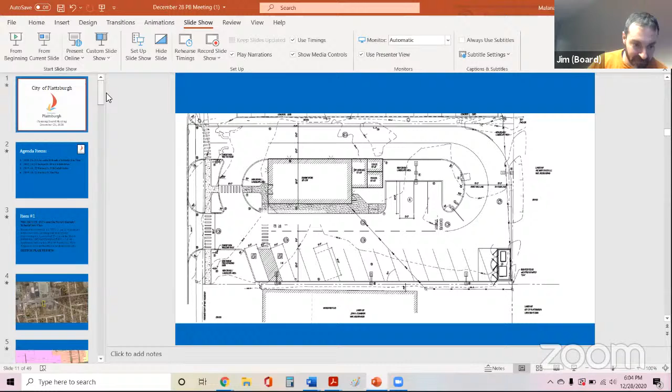The first item is item 2020-21, 311 Cornelia Street, the Dunkin' rebuild. This is a request to construct a 2,572 square foot restaurant with drive-through, parking, and related site improvements. It's located at 311 Cornelia Street, zoned B2, tax map parcel ID number 207.17-2-16. The applicant is Tim Daly, and the plan preparer is Brooks Washburn, and they're both on the call with us tonight. This is a sketch plan review.

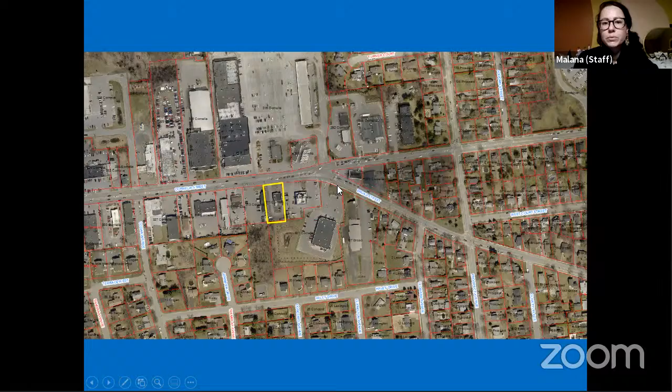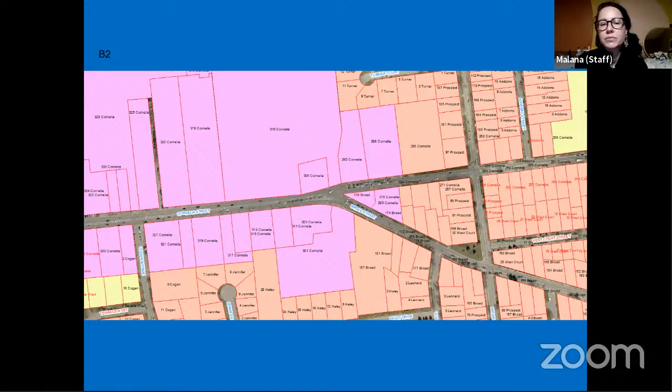This is an overview of the site, highlighted in yellow here. This is Route 3/Cornelia Street, the Broad Street Cornelia Street split. Here's our zoning map showing the property is in the B2 district. This is a demo rebuild, but for the record, I will state this is an allowed use in this district and no variances or special use permits are required.

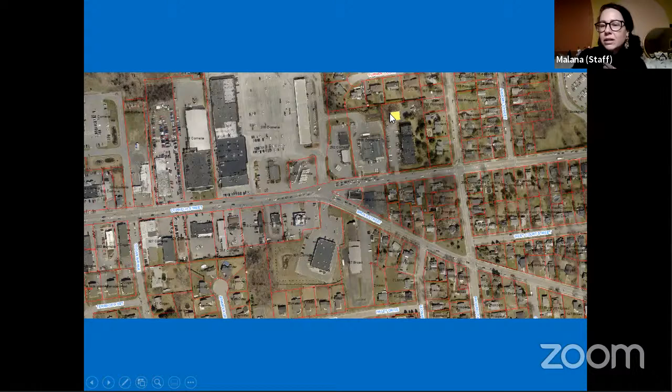This is our historic overlay map. You can see that it is not in the historic district. I think there's a little tiny garage over here that was demoed a few years ago that was historic, but that's it.

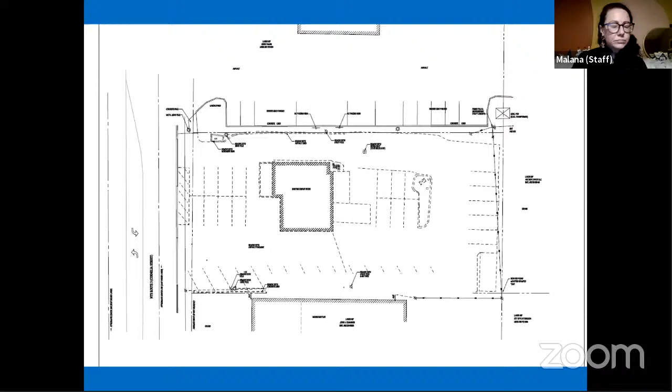This project is at sketch plan review, but the applicant was able to provide the board with some detailed site plan information. This is the existing site plan. You can see the Dunkin' building in the middle of the property, surrounded by the drive-through loop and parking, with no sidewalks.

This is the sketch plan of the proposed improvements. The building is pulled a little further towards Route 3, which includes sidewalks along Route 3 and a pedestrian connection to the front of the building. The site still includes that drive-through lane, with a similar parking layout, and also includes a bypass lane which will be doubling as a mobile order lane, as I understand it.

As I said in the pre-meeting, a lot of fast food restaurants are moving towards accommodating online ordering. My understanding is that people will order online, bypass the drive-through lane, and go straight to the window. There's a bit of concern about traffic conflicts and how those mobile orders cut through in front of the drive-through, and what window they pick up at. There wasn't a clear indication on this plan of whether there were two windows for pickup, so we'll have the applicant clarify that in a minute.

Another comment I had was about this bypass lane looping all the way around the building. You can see here it cuts around the front of the building. I'm recommending to the board that the applicant remove that slip lane from the front of the building, and instead add some additional green space and a seating area.

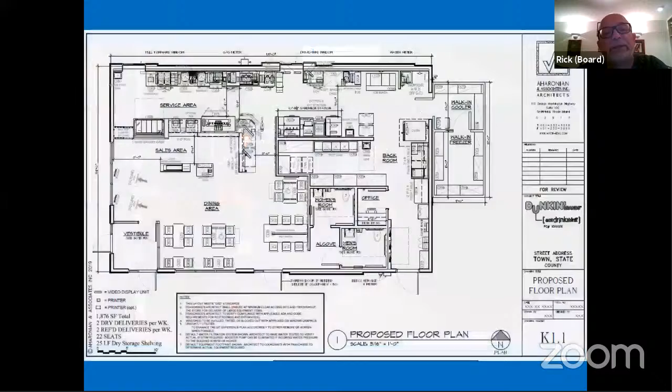I'm going to repeat the question that I had regarding the parapet. Although architecturally it looks really nice, the parapet wall where you have the word Dunkin' seems like its only purpose is for the signage. And I'd like Joe's interpretation rather than making an assumption, so Joe may find it compliant. I think we should ask him for his opinion.

Yeah, it is, as Malana said, it is an architectural form, partly for the reason she indicated, to keep these things from being just little boxes with high and low and that sort of thing. With respect to the sign code itself, the lettering would be compliant with the allowance for square footage of signage.

I hope Joe would say the parapet is a piece of the building, not that the whole thing is a sign. As I said, it keeps these from being just little boxes. The parapets, which you'll see in shopping centers now too, instead of just being long strip centers.

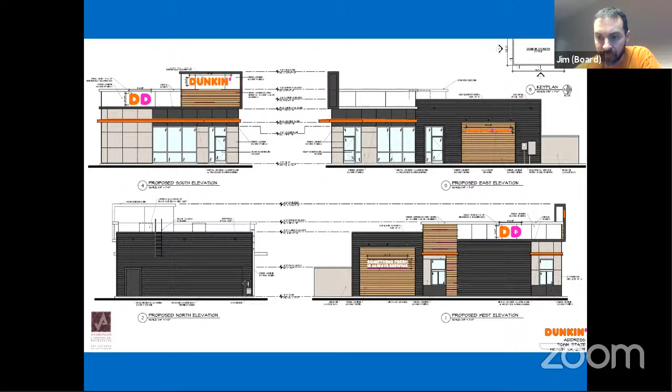Rick, I'll reach out to Joe and get that confirmation from him. I think it'd be prudent to get an overall indication on signage for the site from the applicant and have Joe review that and give his determination. Yeah, no problem.

As Malana pointed out, the floor plan and elevations we submitted with the initial submission was a prototype. This next round will be this building for this site, this sign code, etc. So it's safe to assume your floor plan's probably going to change a little bit with doors, egress, and that type of thing. Actually, the footprint of this building is a bit smaller than that prototype, which I think is a good thing.

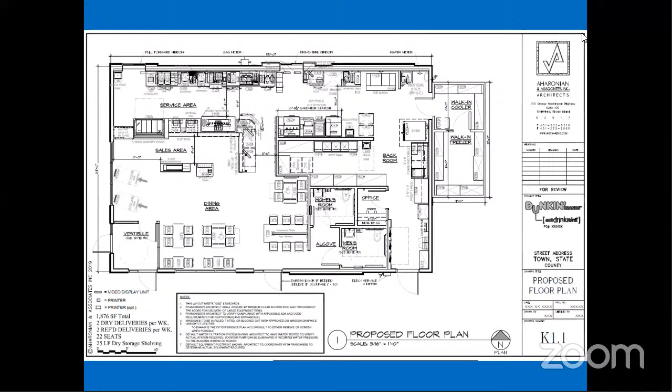I have a couple of questions. I understand this was a sketch plan to get it into the board, and you have an updated survey and probably updated information. Has there been any further consideration and discussion in terms of the slip lane and stacking for the drive-through, and then the angled parking, the way it's oriented right now, and how that might change with the site now that you're taking the parking out of the front, which I think is an improvement, but now you're going to have more people park on the side.

Part of the trend, as I understand from working with Tim, who manages many of these, there is a slight change in the ratio of meals served by the drive-throughs, mobile pickups, and walk-in eat-in. Partly a result of what's happened in the last 8 months, but also a general trend. A lot of people are saying with respect to building designs and jobs in general, we're going to get back to normal at some point, but it's not going to be exactly the way it was before. People are going to keep some of their old habits.

So they're liking the mobile order, mobile pickup, and drive-through pickup. We found there's too much asphalt and too much parking on the present site. If you look at a lot of these restaurants, not just in Plattsburgh but everywhere, there are a lot of empty parking spaces, so we're trying to not have more parking than we need. As Loretta was saying, the front 40-foot setback is respected - that line got erased, but that front 40 feet, with the exception of this little bypass or slip lane, is all green.

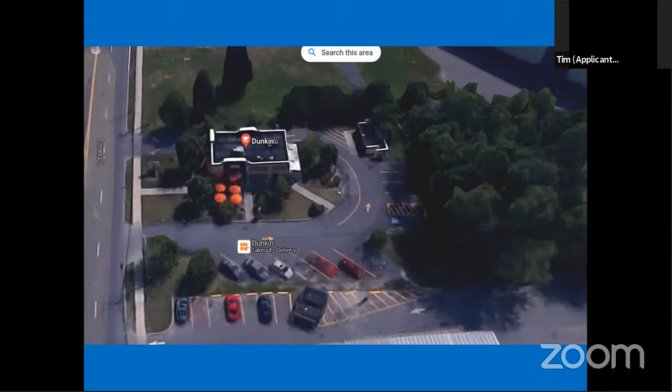Not only the width, but we also expanded further back than where we currently are for ordering, by putting in the island at the back.

This may sound like an odd question, but with Plattsburgh keeping up with the times, will the mobile ordering lane be used like an Uber Express lane for Uber Eats deliveries? I'm just curious how that applies to today's times.

Most Uber drivers now have to come inside our facilities to check orders, though a lot of orders are pre-ordered and Uber just picks them up. This second window should help alleviate some of those people having to pull in and cross over—and that may not be the case here right now, but I'm sure it's coming. From what I've heard, as people approach the drive-through it'll automatically notify us inside that their order is ready to be picked up at the second window. That's not here yet, but it's pretty close.

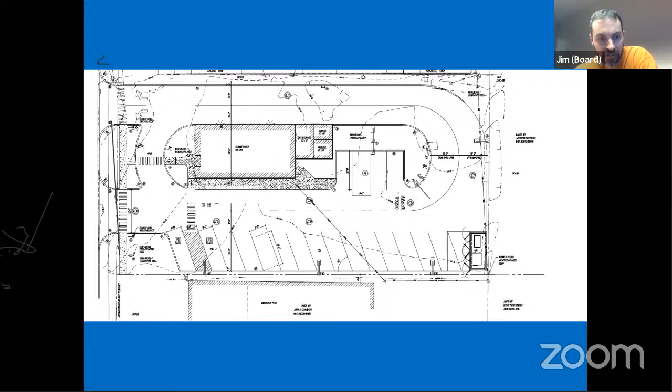Did the board have any further comments or questions? I think staff has done a thorough job in terms of the checklist and identification of items the applicant needs to follow up on for the final plan. The one other question I'd like to ask the applicant is, staff has again done a thorough review of SEQR guidelines with a determination of a Type 2 action under the new standards. However, under your application, you did submit a short form SEQR. Are you comfortable with that determination?

Yes, for a couple of reasons. Number one, we fully comply, and I don't mind doing the short form, we do them all the time. It's an existing facility that's going to be reconstructed. It will be better when we're done than it is now with respect to all these environmental aspects. So we designed it that way independent of the SEQR route you're taking. I'm okay with it either way.

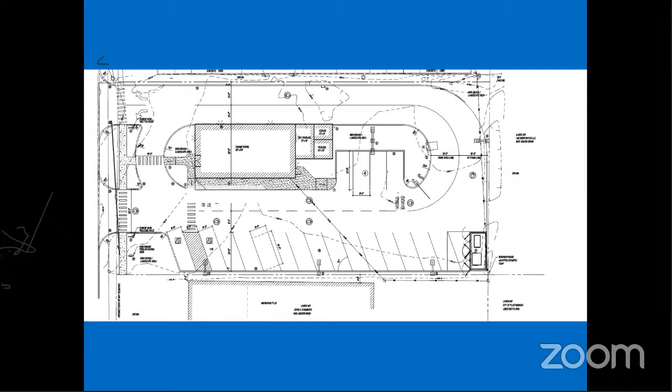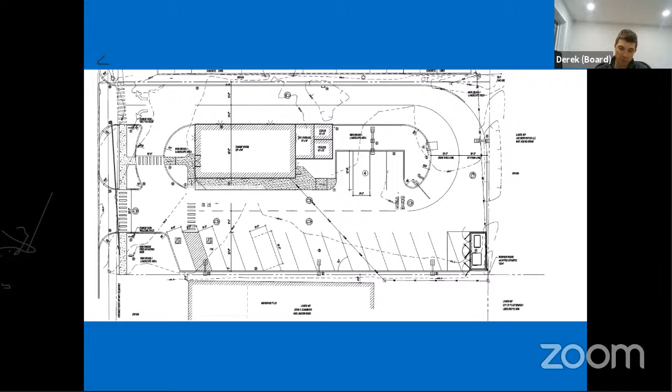Does anybody from the board have any other comments? If not, we do have a proposed sketch resolution, resolution 2020-21. Does anybody have a motion for that resolution? I'll make a motion to approve resolution number 2020-21 for 311 Cornelia Street site plan, sketch plan, to approve the sketch plan. Okay, motion by Derek, seconded by Rick.

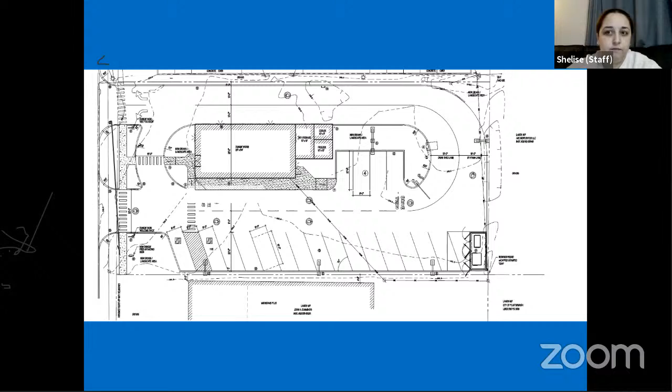Roll call. Abdullah, yes. Marissa Gilbert, yes. Derek Rosenbaum, yes. Rick Perry, yes. Reg Carter... yes.

Little technical issue, sorry about that. No problem, thank you. I do have one other question before we leave this application. Milena, you have in that resolution identification of a public hearing. Does the board need to establish the date for that public hearing? I don't think so at this point. I think the public hearing is held during the detailed preliminary review of the plan, whenever they submit that. We'll notice it then. So we don't have to set a time frame for that. No.

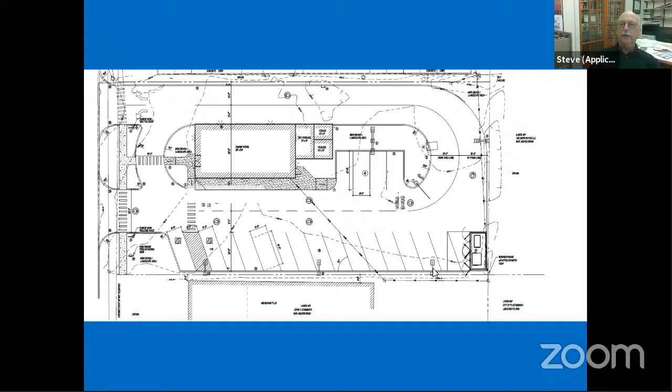Milana, you're pulling it up, I take it? I'm trying to, yes. Okay. I don't recognize that, it's Dunkin' Donuts. Getting closer.

No, that's going in the wrong direction. Yeah, it won't let me zoom in any more than 100%.

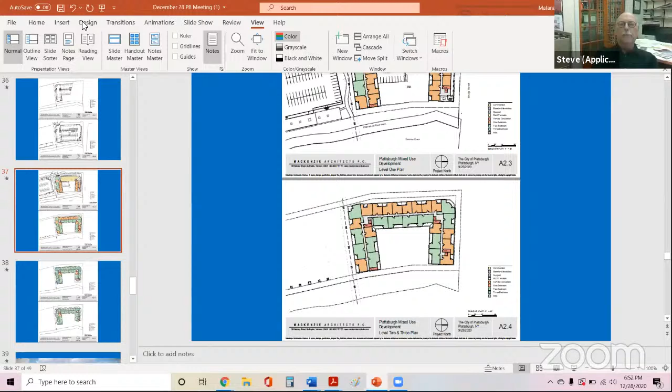Okay, will there be an access into the stair, Rick, from the level 3 units that you see on the floor plan? Yeah, I'm looking at your plans right here. A lot easier for me to follow it. Okay, so the stairwell has a door going into that lobby.

Okay, yep. What I don't see on here, Steve, is where you egress the building. You have 3 doors other than the stairwell. One of them goes into a 1-bedroom unit, one goes into a 2-bedroom unit, and the other goes into the trash service. Right, don't see a door that goes to the exterior.

Because you can't. You're 10 feet above the exterior at this elevation, and you can't get through other than the drive-through at that level. That's my point. Yeah, you have to enter the stair and go down to exit at the park.

Are you expecting people to go through the traffic lane of ingress, egress, and loading zone? That's my question. If it is, we should identify that, and that's why I requested an egress plan that shows something, how people get out of the building. In case of an emergency, you've got to guide people.

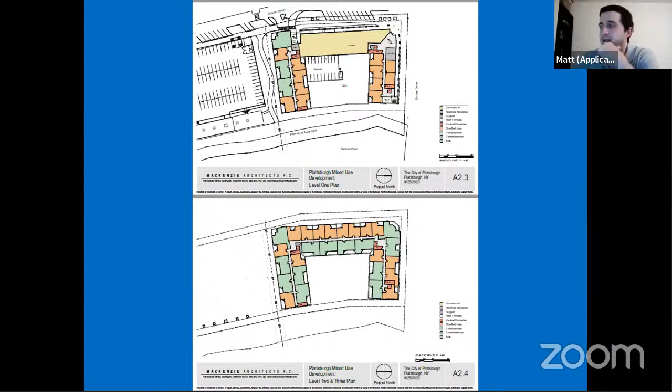Elena, I've got a version of this that we can zoom in on. Do you want to share your screen? Steve, I also assume these are all code issues that we're going to have to address.

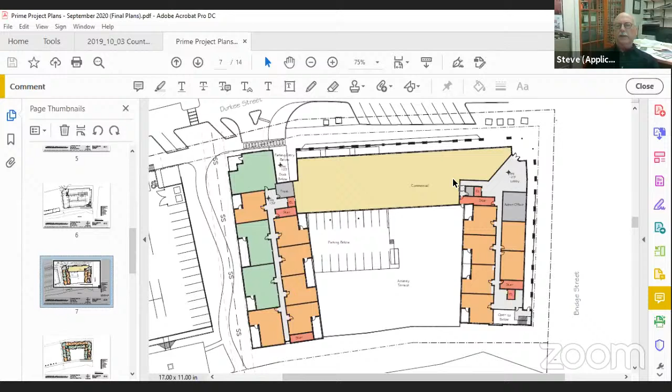Yeah, the plans. Again, that's not a required stair as far as egress, it's more of a convenience. But the way you would access that stair is at the parking level, as Rick is saying, as you normally would any stair in a parking structure, where you walk to the stair and you typically walk down the drive lane of a parking structure to get to it. So the egress doesn't occur on this level because we're up 10 feet above the parking below.

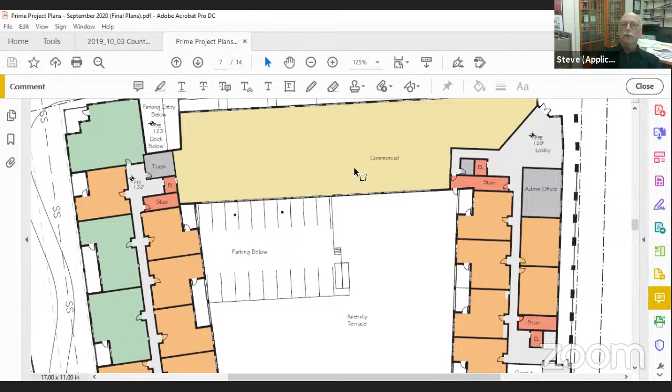So the loading dock, you have to go to a 2.1, the previous drawing. Matt, 2.2. 2.2, yep. Okay, there you go. If you can just identify a pedestrian means to get out of the building within that traffic lane, I think it would be to the southwest if you put your cursor there.

Over here, Rick? Can you just scroll up? If you look, if that's going to be the pedestrian way out of the building, it should be noted somehow, because we have a truck loading zone and 2 driving lanes that converge in that one spot. Where would the pedestrian exit the building?

Well, again, it's not a required exit, Rick. It's a convenient stair for those who are parking in the building. So otherwise, the answer is walking down the same area you'd walk from your car, down the drive lane. So it's open. I'm not going to pretend that I'm current on the code, but what I can say is when you get down to that sub level, and this is your path of egress, it may exceed the distance of path of egress. I'm just asking you to look into it.

If you expect people to walk out there, just show them the way. I think that's a simple request. Yeah, we can do that, Rick, that'd be perfect. That's not a problem as far as code requirements, because we've already researched that. As far as the required route and the travel distance, that's served by the two end stairs and the corner stair by Durkee. So we technically wouldn't need to have a stair there at all, but it's there for convenience.

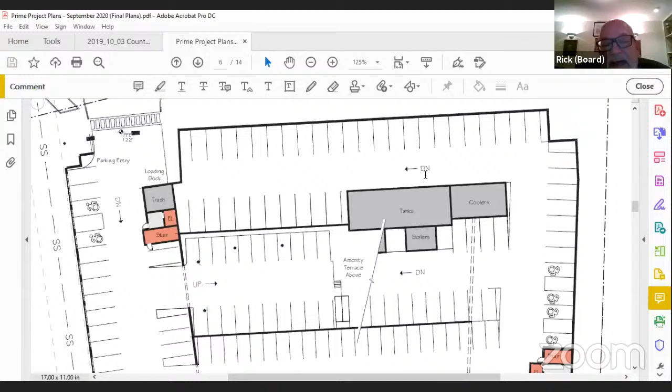Yeah, well, if you're exiting that first living level, or if you're in the sub basement level and you're exiting out that stairwell door, then you want to exit the building. It should be identified.

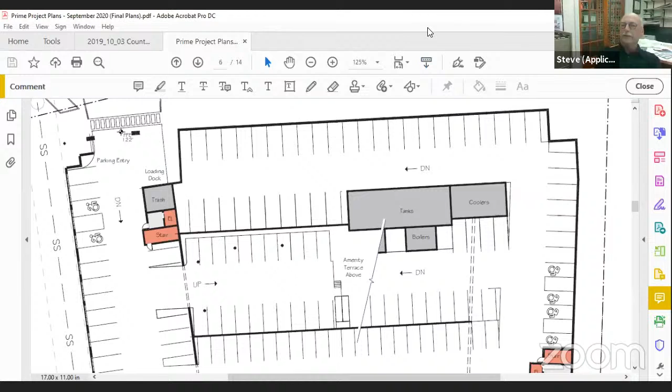Yeah, it will be on the fire safety plan. Perfect, that's all I'm asking. How do we do that? Yeah, that's what you're asking, is the fire safety plan. Yes, okay.

Elena, would you be able to pull up that parking table that you sent out to us today? I think it would be good to put it on record where the current totals are, as far as what's being removed and what's being added. I don't know that I have that saved anywhere, I have it in an email I sent to you guys. Let me see what I can do.

I can kind of summarize it, Derek, while she's pulling it up. We needed 217. We were utilizing 16 of the spaces in the 92, the surface lot next door, so that left us 16 shy for our use because we added more public parking spaces. So we were at 293 minus the 92 is 201, and we needed 217 dedicated based on our alternative parking.

Okay, thank you Dean. I was referring to another table that Melena had put together on my request earlier today, with all the parking spaces in the downtown district. Yeah, I've got it right here, I'm just trying to crop it and save it as an image so I can pull it up.